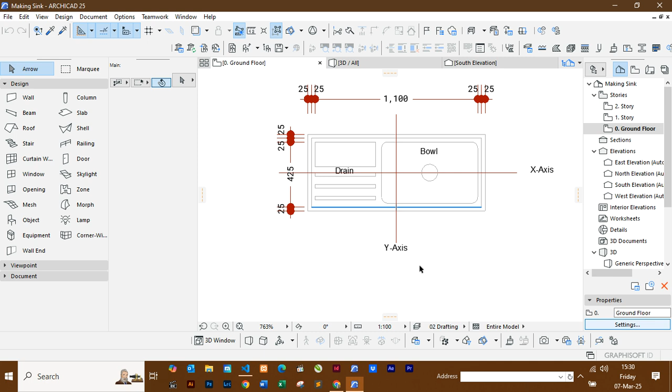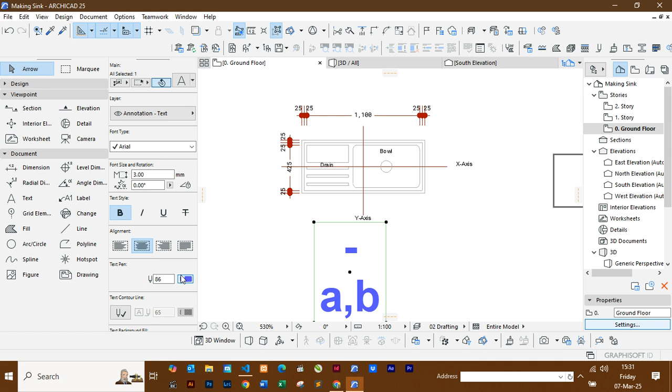The values of A will be minus A, and B will be positive B. Okay, don't worry, my computer is a bit slow, I think I have too much on this computer. So these are the values, if you have to put in a value for A or B, start with that.

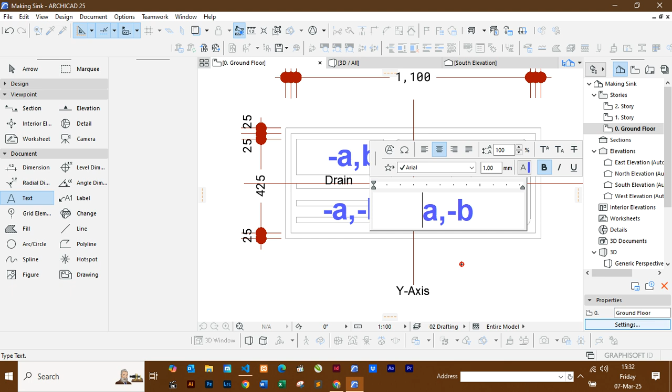When you come to this other side, this will be minus A, minus B. And you go to the other side, this will be positive A minus B, and as you can expect, the other side will be positive B and positive A. So those are the guidelines, and I'm sure most of you can relate with what I'm saying.

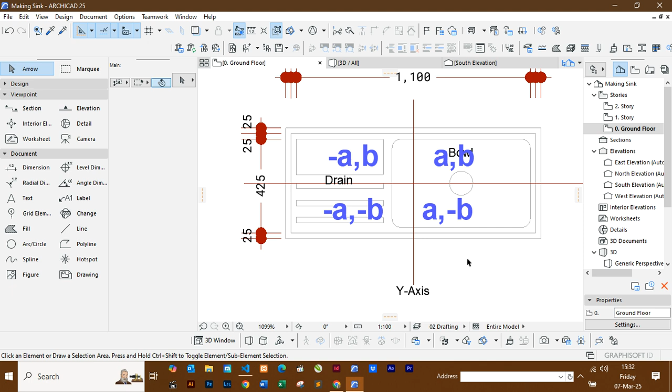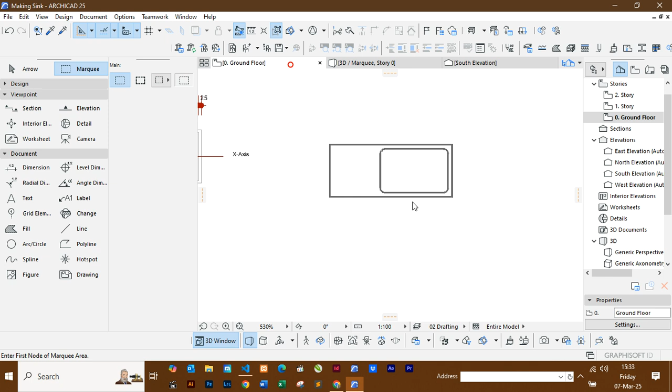So our first job today is to create the last part that we didn't do. Let me show you, this is the sink that we had. You see, we were able to put a hole, but the bottom part is not there. So let's do the bottom part first, and then the hole.

We'll go to, you have to click on this object, then we go to edit. We said we work with this toolbar. Go to edit, and let's go to the 3D.

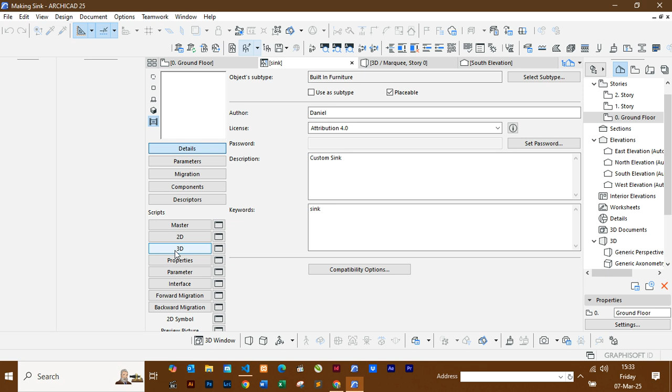Last time I remember we wrote GOSUB 100 to cater for the body and 110 to cater for the sink bowl, and I did the opposite. There are two methods to that. The first method would have been to use the cut method, which I'll show you right now, using the hole, and also the other one is using the same prism that we had, the H prism, you just cut from there. The first method involves two objects, you cut one from the other, and method number 2 is just one continuous process that cuts one from the whole.

Now let's take this 110 now to be our bowl bottom. Bowl bottom, and therefore we'll come down here and we do 110 and a return. Yes, it's okay, 110 and a return. You can write something here like what we did here, and this is bowl bottom.

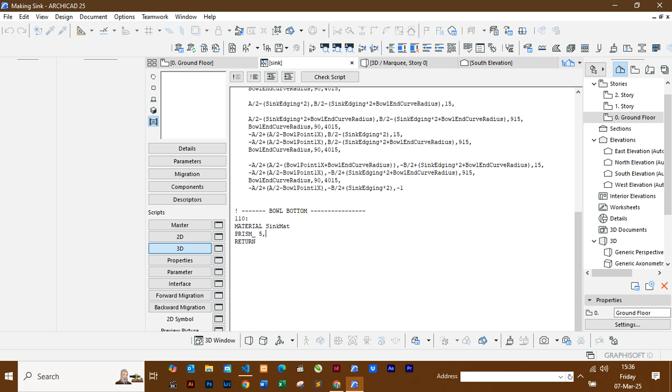We don't need edges that are curved. The first item is the number of sides or corners, and then the height. The height for this should be the same as what we put as the sink metal thickness. Come here and put it here.

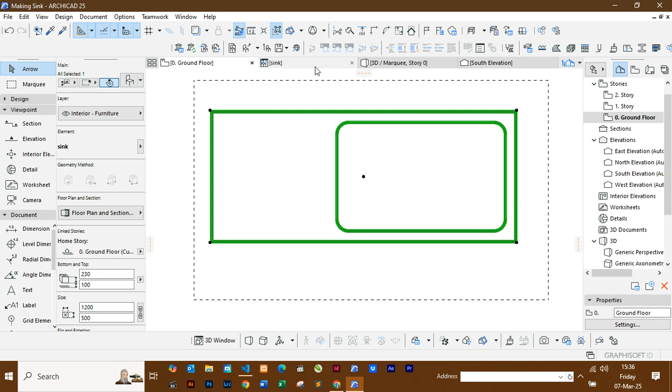And then now we can do our prism. If you look at what we have here, already we have something that we can even copy from. The whole of this bowl, the coding for this bowl is what will put the bottom for us. So come here and remember our bottom started from here. Our bowl started from here and ended here. So we can copy the whole of this and then we put it here.

The other item is label used twice or more. GOSUB 110. Are they specific about the line? Oh, line 91, sorry, let's check. Okay, let me cross check a bit and see where the problem is. Check script, it says label used twice. I've gone through and I don't see where the problem is, but I remember we wrote 110.

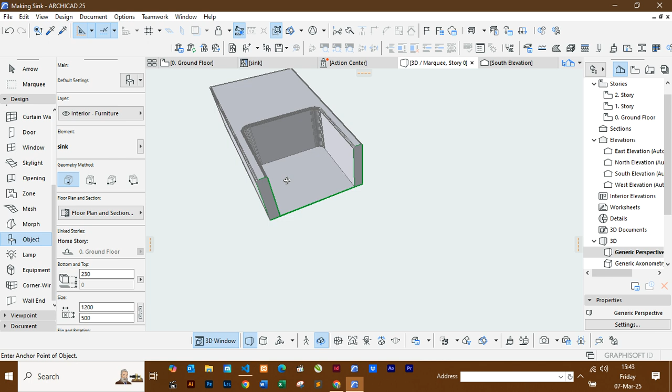Yes, there you have it. My viewers, I hope you can see this. That's the bottom. Well done. Now let's cut the hole.

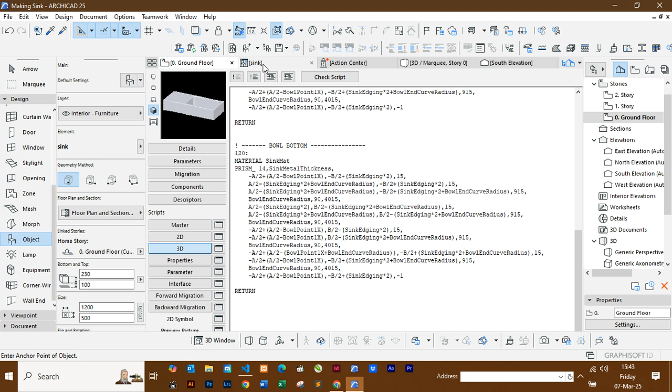If we go to the hole, all we need is the center, and the other script. So for us to cut the hole, we'll need to proceed from the bowl bottom. Put a comma there and we look for the center, the coding for the center. We can use measurements. This is the center of our circle.

From this it's 375. We can do those as parameters. Come here, parameters. Let's do bowl hole.

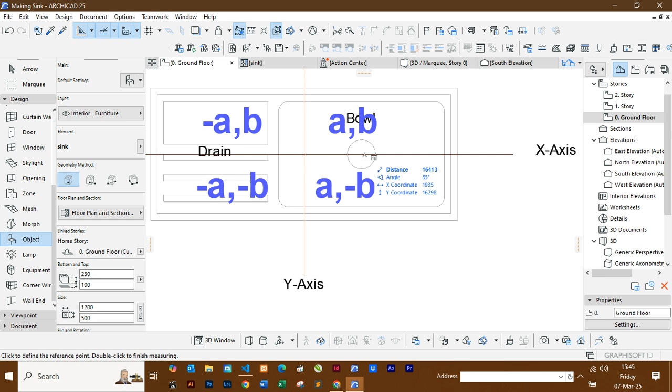X axis, the measurement 375. Then we take a measurement for the other. This should be 0 because it's already on the y-axis, it's exactly at 0.

So we can proceed with our 3D. That will be a divided by 2 because it's on the opposite positive side, minus the parameter we've just written, this one. B is 0, and remember we said 915, and then we pick these ones.

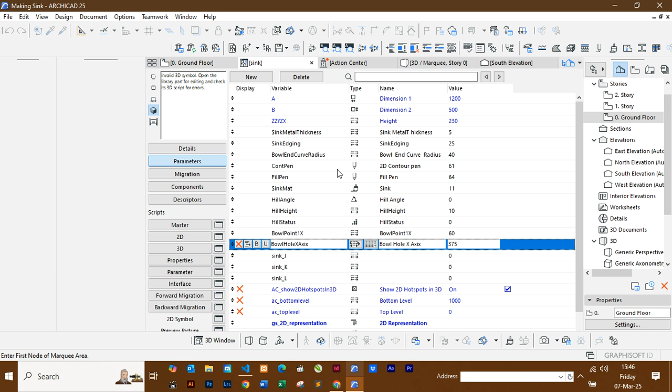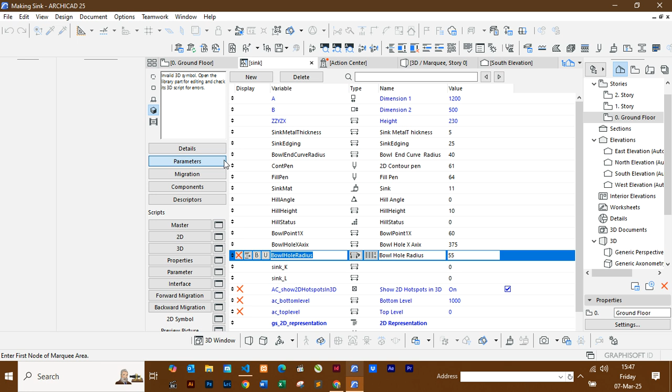What is our measurement for the bowl? No, it's not there. Let's call it bowl hole radius. And this is 55 because the diameter is 110.

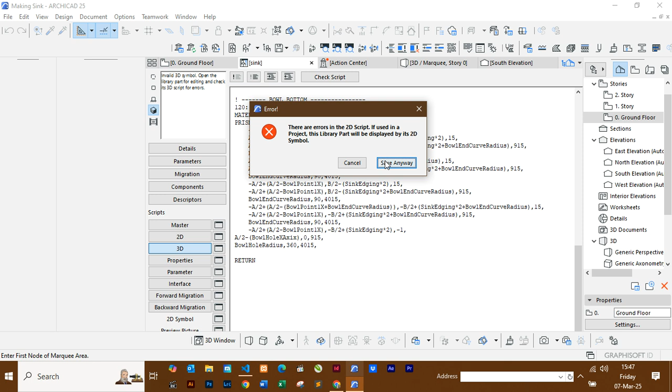Go back to the 3D, copy and paste here. We are going a total of 360 degrees, and then we can finish. Let's see what we get. We've added two points, that makes it 16.

Cross check, line 66, return. I need to go to the first point. Cross check - you can see keyword cannot be used, but our last statement here has a comma. We should always remove this. So remove it, let's check. You can see it's okay now.

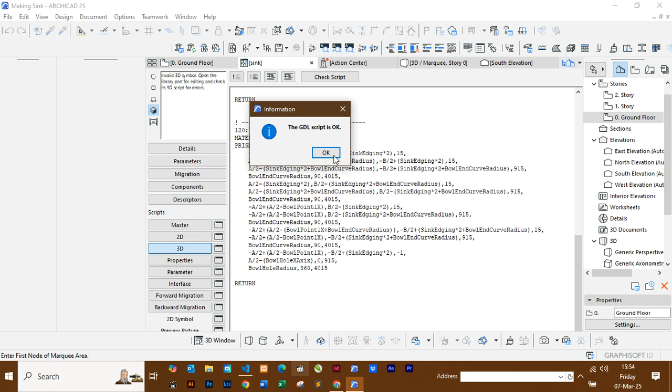Let's go to 3D, and for sure we have our hole. Let's save. Go to our object - unfortunately it's not updating. Need to delete and bring another one. You see, that's our hole.

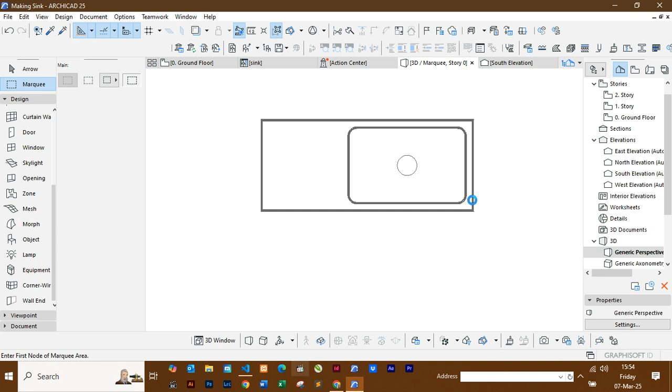Let's see this one. My people, you see the hole? There it is. Okay, that's fine.

Now we proceed to cutting the drain area. Let's proceed with the drain. First of all, we need a few measurements. We need to know how much is the width and the length of each, so that it's possible for us to construct. We need to know this offset from the front to where the first one starts.

That's 71. You can capture that as a parameter. Let's call them drain offset X - no, this should be Y. Y offset.

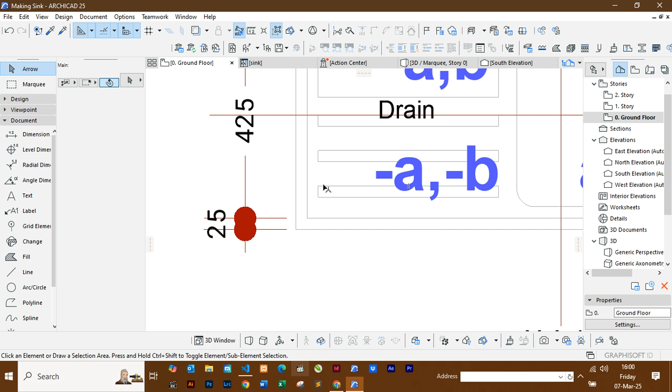You can always do better names for these parameters. You've seen it's 71. Drain width - this will be 24. Drain width is 24.

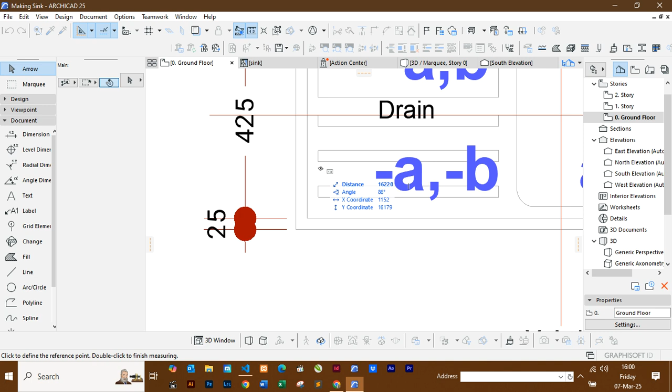Put some more variables. You can say drain spacing. Drain spacing is this one, from here to here is 53. Now just copy this.

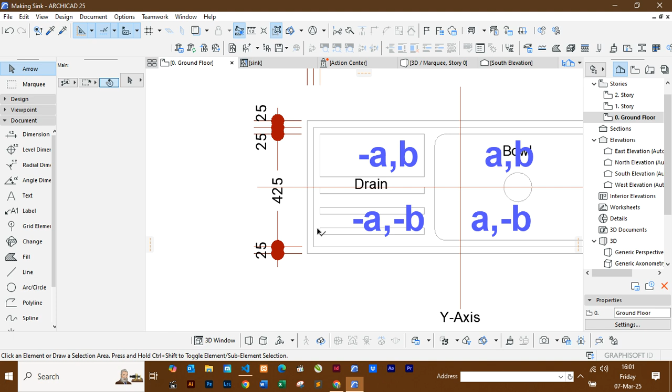The other item that we need is to know these points, like this offset from here to here, 141. So the offset for X should be 141. Can copy this.

And the last item that I think we need is the whole length that these things need to cover. They need to cover a length of 179 - that is the length that they need to cover.

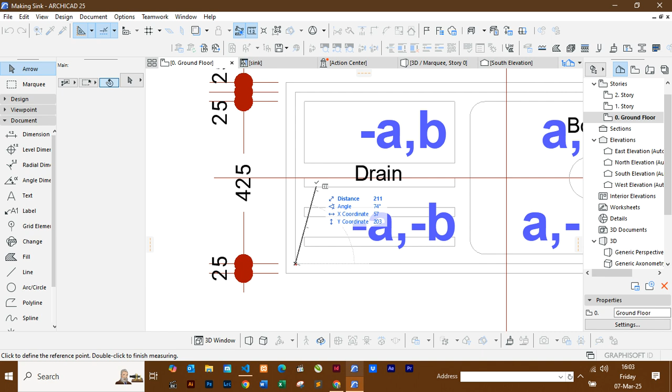Last item - sorry, I'm using an external keyboard, that's why I'm having very many issues - drain coverage length. You've seen how many we've seen. Let's start from here up to here, 225.

Copy this, paste, then you can save. Okay, now for the drain area, let's give GoSub 130 as our drain. That is our drain. Come down here, also have 130, comma, and a return key.

Always make sure to see exactly what you are doing. We are creating the drain. Now we've already made some measurements here that will dictate what we need to do.

So the first thing that we need to do is, for anything that means creating more than one item at the same time, especially when they are going on the horizontal, we use a loop that is called for. So use the keyword 'for'. We normally use dist, or you can give it a different name. Is equal to 0 - we already say 0, TO. And for us, our TO is this drain coverage area length.

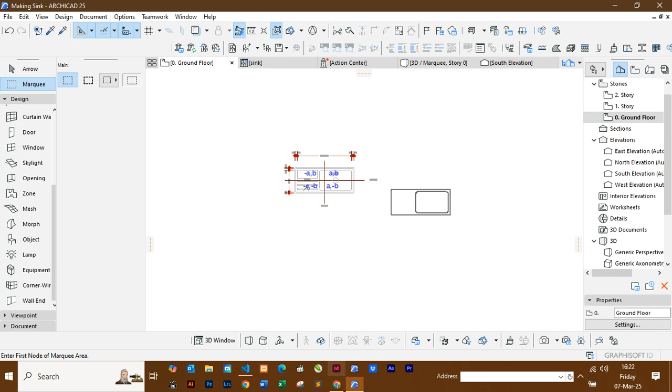After this, we go to add, depending on the direction. Our items are going towards these ones - they are going towards the y-axis. So the next thing that you write is add y with the dist. And then now you can construct your item. I want it to have the same item - you can just copy these items here.

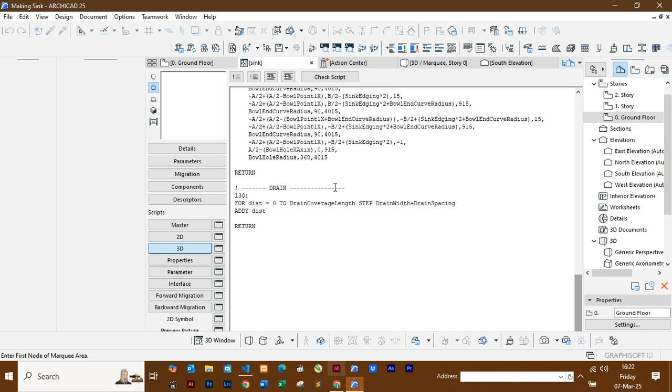The H prism to have curves - H prism, ours will have 5 sides to still have the same things. And then we'll change the others as we go along. The first point here, it is minus a, this one, plus 2 of the edges, 2 of the edges. So it is minus a divided by 2.

Plus, can go to the parameters, sink edging twice, times 2, and for b it's minus b divided by 2. Doesn't matter whether it's a capital or not, but I like capitals. And then add the y spacing, this one.

And then 15. The next point is minus a divided by 2 plus this point here. So what does this tell you? It means you have to take the whole of minus a divided by 2, then you minus, or you add, because it's a minus, a divided by 2 minus this length. And that length happens to be the drain offset x.

So come here, into brackets, a divided by 2 minus the drain offset, and then b remains the same. Can pick this one, and you can see here this point is just an addition of the drain width, whatever size we gave. Drain width 24. So come here to this, maybe you can do brackets, add drain width, comma, bracket, sorry. Then copy this.

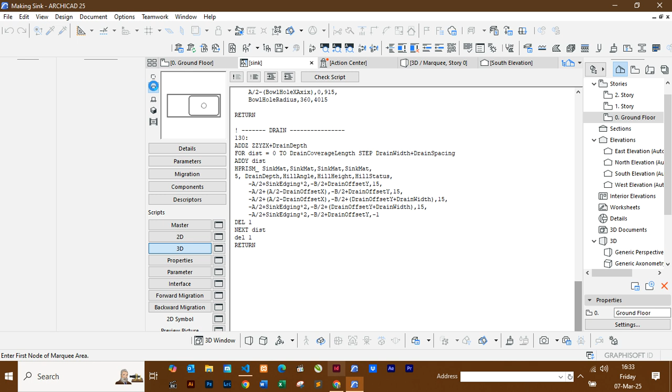Okay. Paste. Cross check for errors. We are good. Let's see our object. Hope you've not made any mistake. For this, should be able to. Oh, have I saved? I don't know. Just a minute. As it stands, you can see our GDL says is okay, but we can see no changes to our sink. And I remember we were talking about the hill height. This is too much. Remember, our item is only 4 millimeters and our hill height is 10, so that's too much. The object will just disappear.

So we need to create a new thing here, drain hill height, and here let's do a 2 so that we don't have it curving too much. Can have that. Save. Copy this. Go to our 3D and replace this with the right height. Then we can check.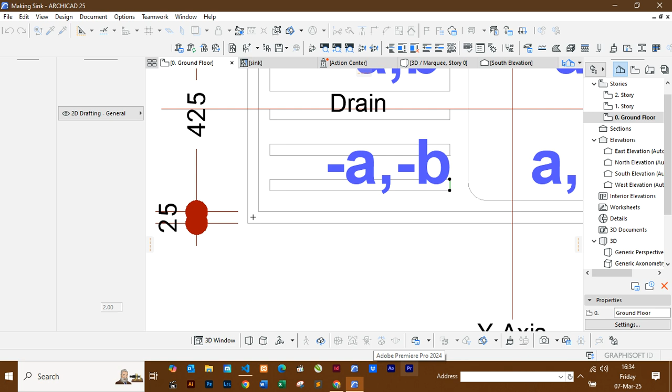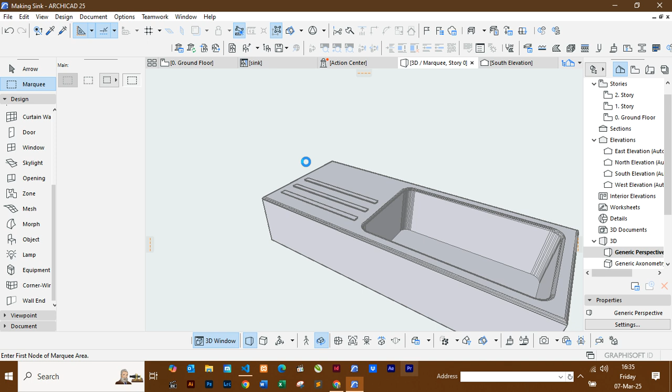Guys, you see what I'm saying? Let's go to our ground. Oh yeah, just look. See, you see guys, this is beautiful. Beautiful. Let's do the last item, then we cut the unnecessary parts.

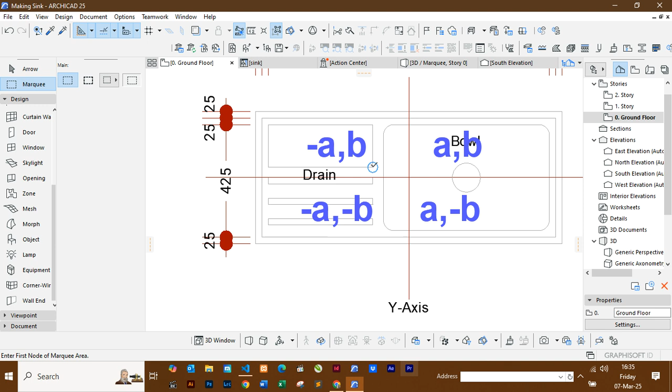So we need to get the measurements for the first part and the second one, which are equivalent to, okay, let's see. Let's get the sizes. Let's see how much is it from here up to here. 221. We can call that drain 2 y offset.

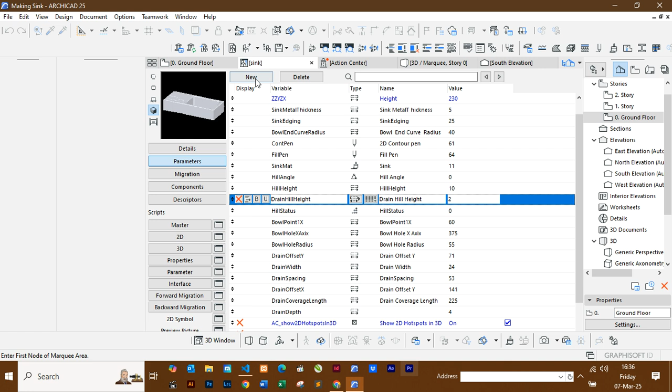Come here, go to parameters, put a new parameter here, drain 2 offset y. I think 221, but let's cross check. From here up to here, 221. 221.

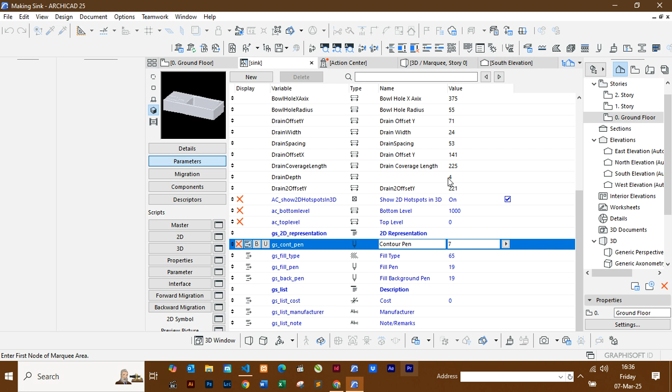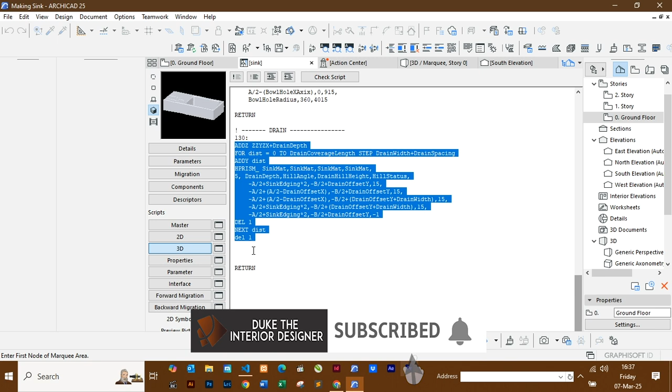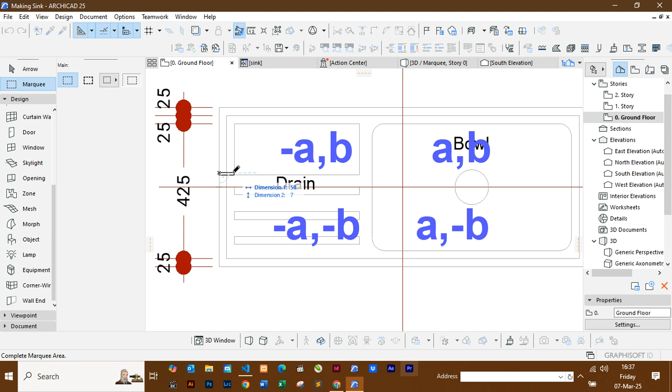The first point is 2 edges, which is correct. This is 25 and another 25. And then the other one is, that should be positive minus the drain 2 offset.

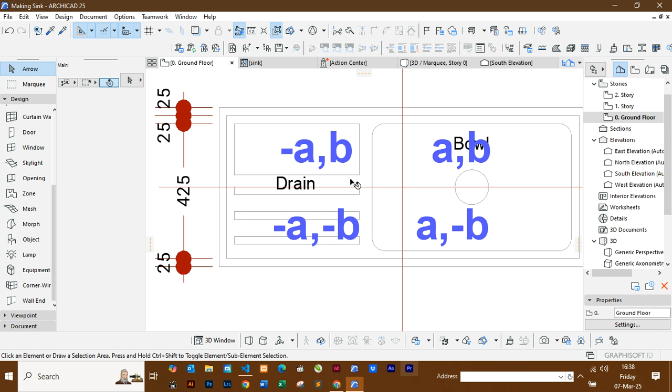Drain 2 offset, and then we go to the other one. It is this minus this, that's correct. But for point B, just a minute. Oh yeah, I was here, I'm here, this is point B. So point B stands, point B is the same as point A, so I can copy the whole of it.

Then point C, it is A plus this, that is correct. But for B, it is B minus, I think, 2 of these 2 edgings. Copy. Two of the edgings. Let's cross check. Yes, 2 of these. We go to the other point.

We should copy the first point. That is point number 4. Okay, then A is correct. B is B minus 2 edgings.

Copy. And then we finish with the first point with the minus. This time only one delete, that's it up to here.

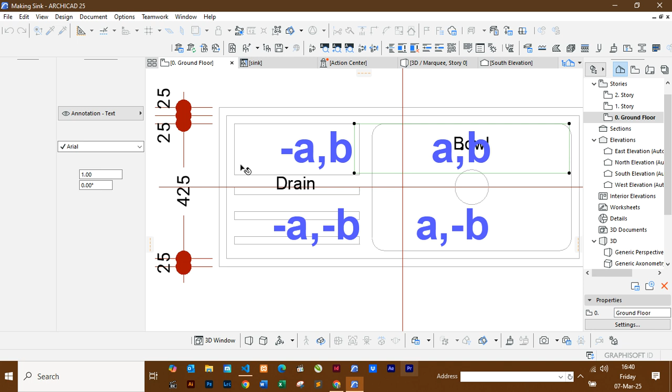You can put more details, it's only that I don't need to put so much. It's just for tutorials. You see?

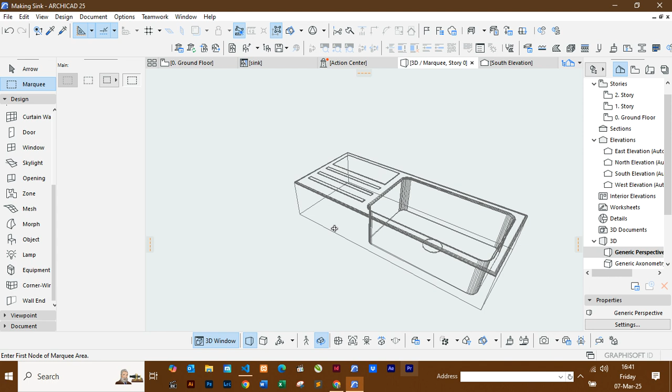There you go. Now we come to the most difficult and most exciting part: to cut the unnecessary parts, like you can see a lot of materials that we don't need. So that will involve

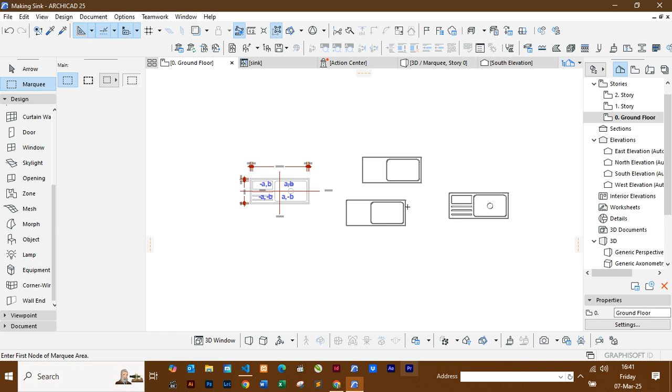For us to do the cutting of the outer body, we need to make our cutting object bigger than the rest. So what I'll do is offset the outer line like this,

and offset, control, I'll offset by 25 so that it's the same as our edging, and also offset our bowl area.

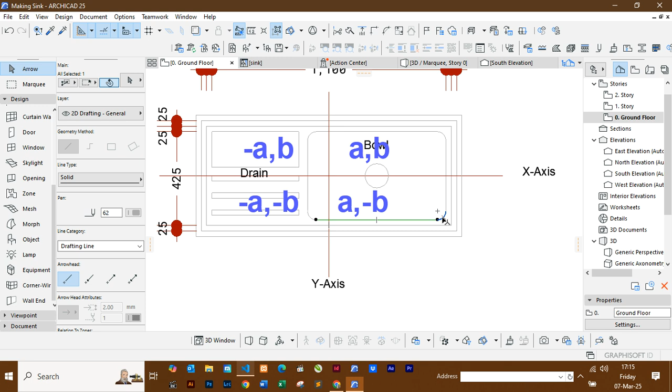Pick this, this, this, this, this, this, this, and that. Then let's offset.

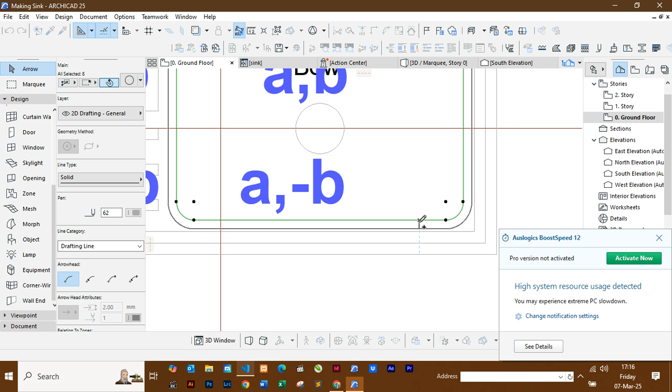It's okay now. Control by 5, which is the thickness of our metal. So the first thing we'll do is create that cutting element, then we do some subtraction.

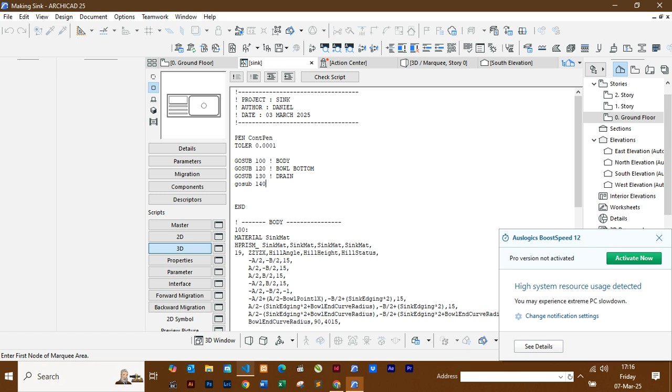Come here, do 140, go sub 140, and this will represent the cutter, the cutting element, cutter. Let's make it

140, return. Let's have this as the cutting element.

Like we did the body, I would want to do the same here. So let me pick this, all of this, copy

and paste here. This time we don't need to be complicated, just do the prism, delete all these, and we need the height to be the same, and remove the other parameters.

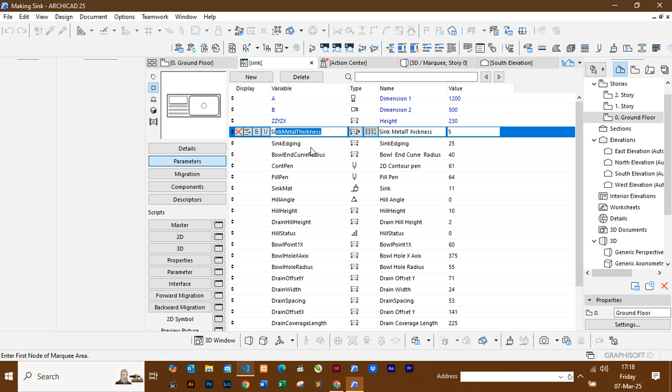So we've said that we are adding the whole length and width of the cutting elements. Minus, divide by 2 — you need to minus so that it becomes bigger — and that will be, we are adding the 25, the sink edging. This will make our work easier.

For B, again minus. For A, we add. This we minus. For A, we add. For B, because it's positive, plus.

A, we minus. B, we add. Remember, we are making the surface bigger. Minus again. And for B, minus. And the first outer item is created.

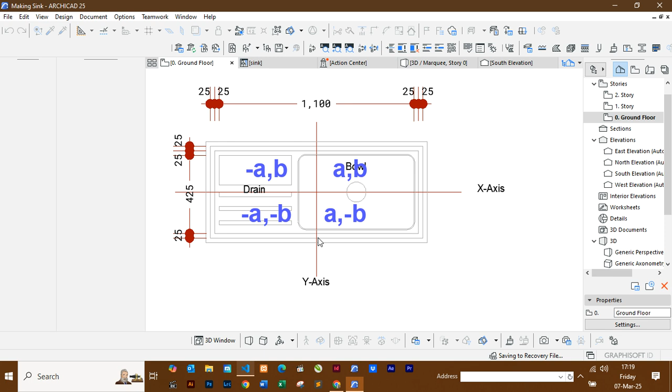Now we cut the bowl area. The bowl area, we need to keep referring to it. We are starting from this point here.

So this point would be the original that we had for A, which means it's still the same point, which is here. So A remains, but for B, it is 2 of these, that is the edgings, plus the radius.

Okay, let's first see what is there. Let's separate this. We've said A remains, but for B we are talking of 2 edgings. Yeah, which is correct.

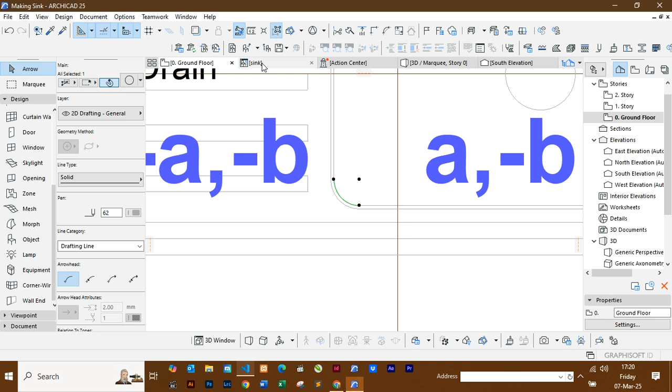For B, let me see — for B, minus B plus sink edging times 2. Was it ever correct? Sink edging.

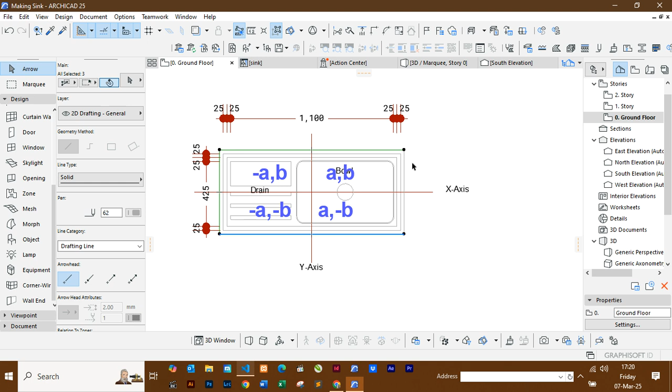Oh sorry, I'm forgetting. I should put this in a different color so I don't confuse myself. Make this, so we are not counting this line. Okay, I'm correct, so it is 2 edgings. This is 1 and the next one was here.

So it is 2 edgings minus the, no, the thickness of our metal. Sink edging minus.

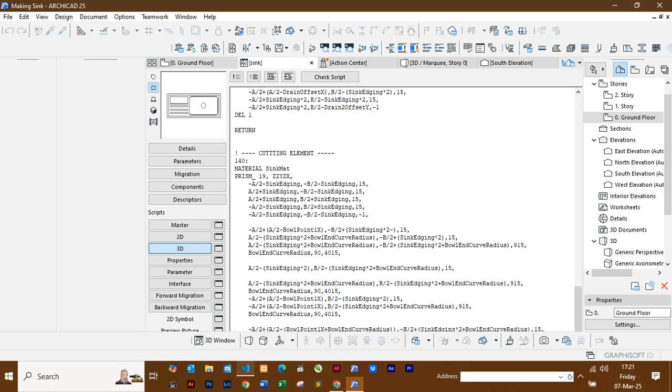Okay, so that's correct. We go to the opposite direction, opposite point, which is here. This one, B — we go to the opposite direction or opposite point, which happens to be here, which is this one.

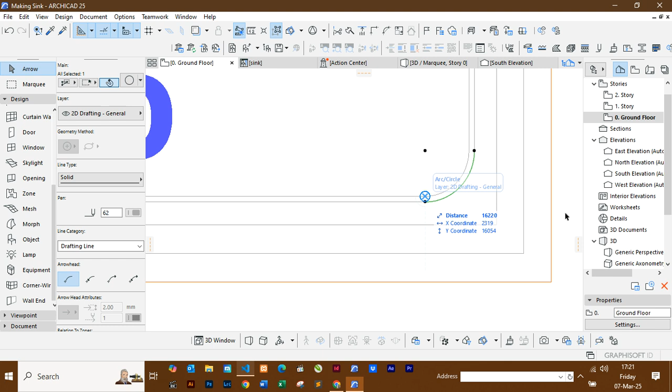A will still remain as it was, but B has changed. So come to this one. A stands, but B again we remove the thickness. So those points are correct.

Now we can bring back. Okay, we go to the other one. Since we are here, we need to find the center, and you can see the center is still the same and everything remains.

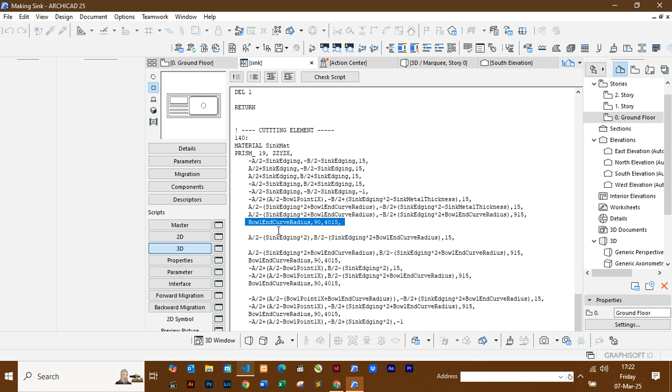So this point for making the center is correct, and for this bowl end curve radius — oh sorry, this one has increased. Our radius now is the original radius plus what we are adding, as there's so much data that it's very easy to confuse. Where is it? The sink metal thickness.

So copy, add here, plus — not here, to the radius — plus that, and then that is complete.

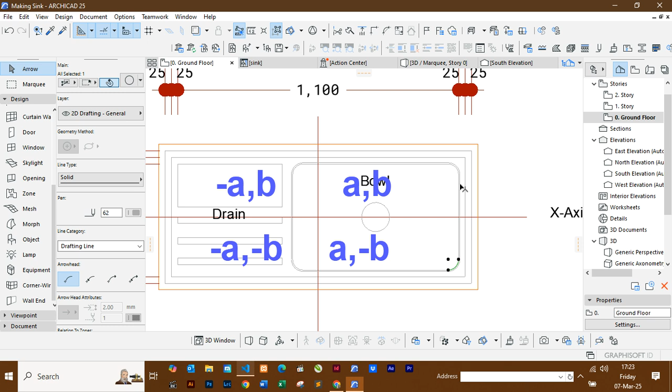For B, you can see it's still the same, so it is 2 of these and a radius. B, 2 of these and a radius, correct.

Again, we go to the center to still remain. We only need to add the sink metal thickness, radius still the same.

We are now at the far corner here to the left, this point here, before we do the curve. So for A, it should not be added anything, but for B we remove. Perfect, so A, don't add anything. For B, remove, so minus here.

Then we go to the center curve, center of the curve. You need to add, okay, and then the curve, it's okay.

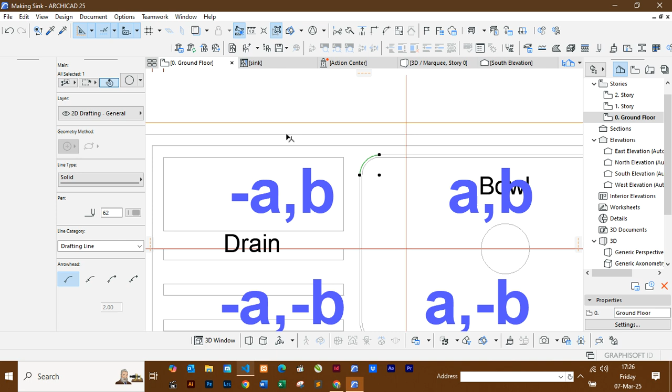Then we go to the last point here. Last point should be this one. This is whatever you have minus, and then for the other it's full.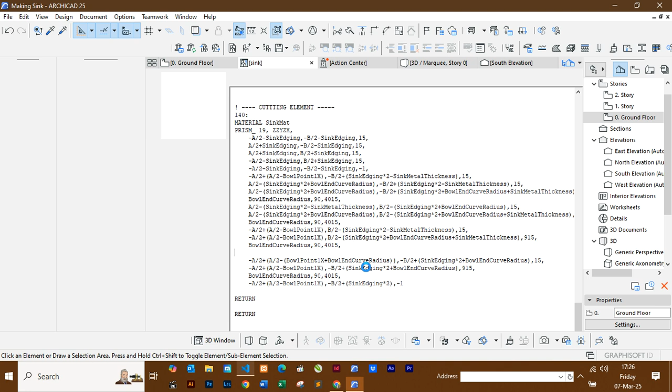A will be... oh, A we add, the other one we don't touch. A plus sink metal thickness. A lot of maths, but I love it.

And then for B, it is distance, 2 of these and a curve. So those remain, and add sink metal thickness for our curve radius.

Then take the first point, which was this one, and finish with it here. Remember, this is -1. Cross check.

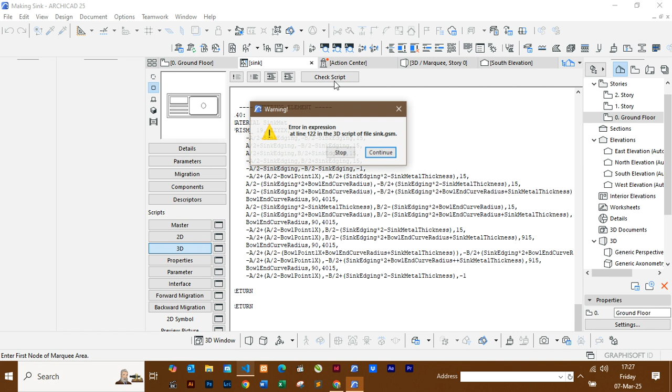Error in expression at line 122. Oh, we don't need 2 of these, I hope.

Error in expression, minus... let me cross check, guys, then I'll be back.

I've checked the error, and you can see here there are 2 pluses, so just remove 1. That is the mystery of coding. You make mistakes, you have to be very, very keen to cross check them. So check, and there we have it.

And you can see from our plan, we already have 2 lines, one for the outside and the other one for inside. Now here comes the magic.

We need to cut the main body with the cutting element, and therefore we introduce go sub 150, go sub 150, and this will be our final sink.

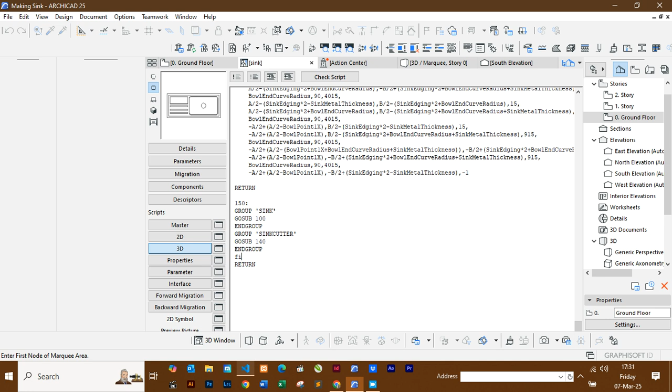Add group, and then we write the expression to give us the final product. Final sink is equal to subgroup

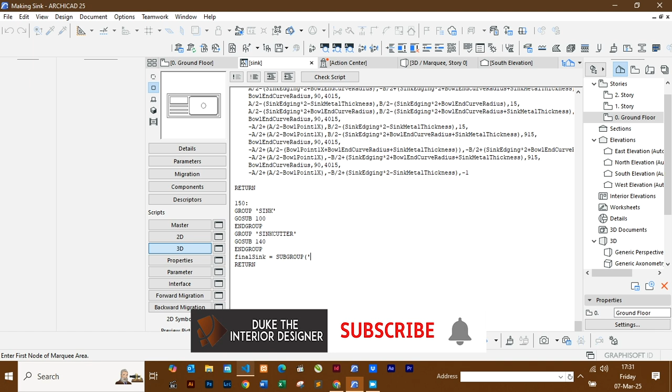in apostrophe, I don't know. Start with the sink, then sink cutter,

and then you have to use the word place group, place group. This helps to show the final group on our drawing, and our place group is this one. This is the final group, and you also have to kill group so that no more cutting can continue.

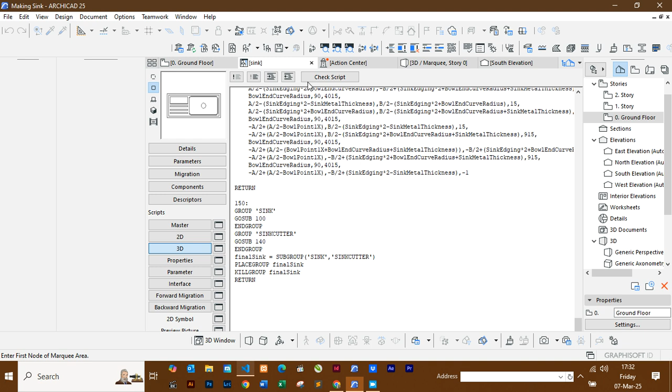Oh sorry, should have used this. Check, it's correct. Now, once you have this, you need to remove the body that was cut

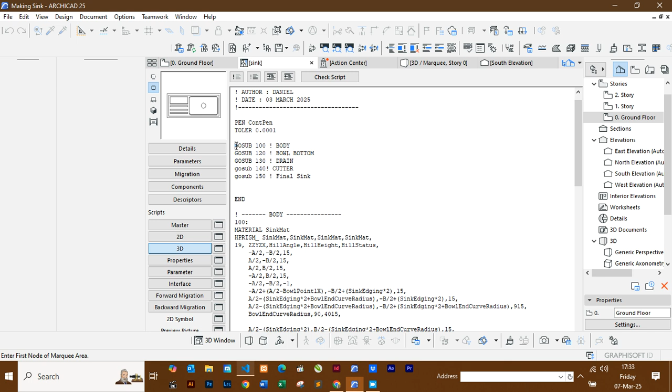and also the cutter. Then you can check our products. Let's see whether there have been errors, and mostly they would come from here. Let's check.

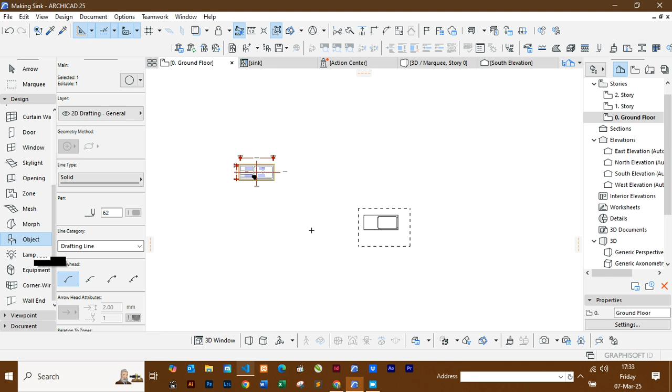Let's copy here. Oh, just forgot one item, but it's okay.

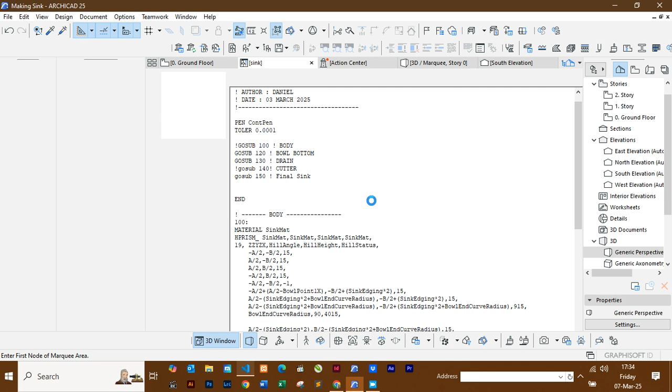Let's go back. The cutting element, you can't place it in the same place as the body. So the cutting element, we need to add Z so that it's below a bit.

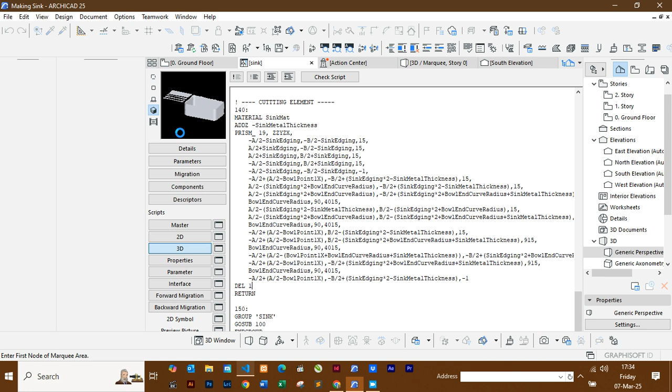So add Z, we minus the sink metal thickness like this, and then remember any add expressions need delete one. Let's see whether there have been changes.

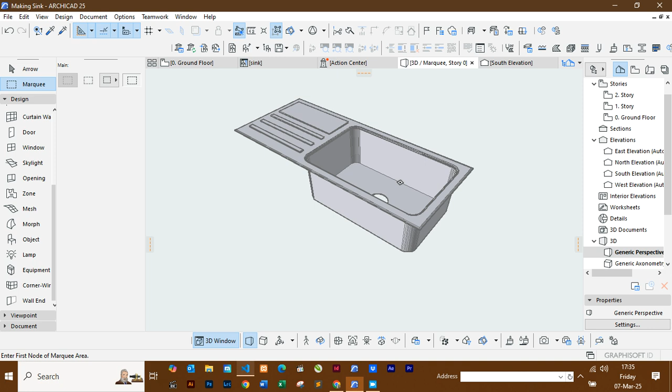I've done it. We finished our course. You can do many things with this. You can add whatever you want.

I know there should be a place for tap, you can also add that one. I think I've done my best to show you what needs to be done.

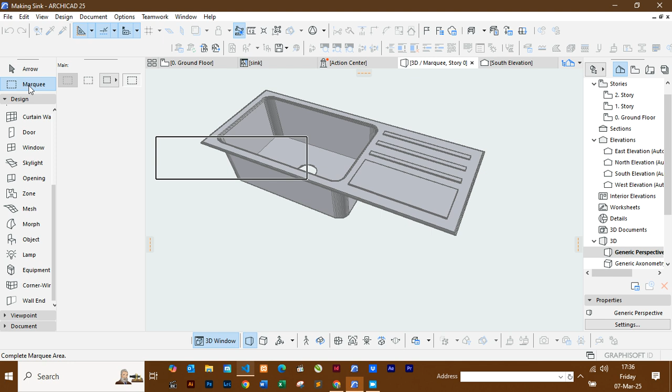Keep practicing, do more, make your own objects. They make your project very customized. And in most cases you find some things you don't find them from the library that you have in ArchiCAD. So create your own, you can even sell. There's a lot of market for these objects.